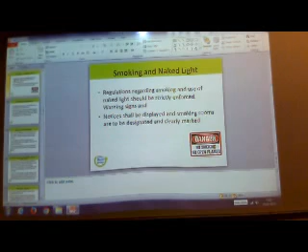If we just carry on from this previous presentation we looked at, we saw that finish up on smoking and naked light regulations.

Firefighting equipment to be available to both ships for transferring, and one of the best mediums to use is foam monitors, where we use a seawater pump, fire pump, and we mix a foam concentrate, and you have foam cannons that you can spread foam to cover and smother any fire that's taking place. Water can be provided in the form of a fog, a mist, which helps suppress any fire or burning.

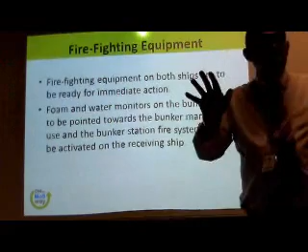And go towards the bunker station. So that's the contingency.

Earthing on a switchboard. The switchboard on a ship. Hello.

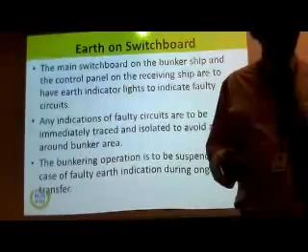When a ship has to generate its own power, its own electrical system - what normally happens ashore, if you get an earth, you know what I mean by an earth? If you get a break - not static, actual flow of electricity. If you have electric cable and the cable gets damaged or burnt and you get exposed conductor, exposed wire, it creates a path to earth. So it's like a short.

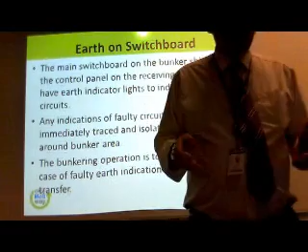But on a ship, if our circuit breaker trips, then we could lose vital equipment, like for navigation, for steering, etc. So we can't afford for a single earth to trip the electrical system.

And what we have on a ship is an earth fault detection system. So if we get an earth fault, we get an indication, an alarm to tell us we have an earth. Earth can be caused by water getting into equipment and leaking, so the electricity is conducting to earth, or it can be caused by a break in the cable exposing live contacts. So we get an earth fault.

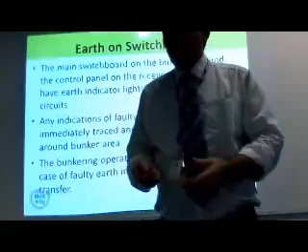If we get an earth fault, what we normally have is an indicator panel that tells us which area the fault is in, and then we can isolate circuit breakers one at a time until the fault disappears. Then we know we've got rid of our earth fault.

And if we get two earth faults, this can lead to a direct short circuit, and this can cause a blackout of the vessel.

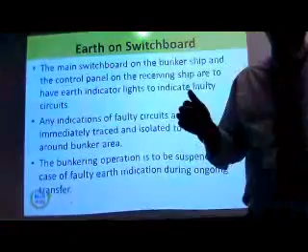On board the ship's switchboard panel, we have an earth indicator light to indicate faulty circuits. We don't want any electrical sparking or arcing to take place that might ignite - so on indication of faulty circuits, we immediately trace and isolate to avoid arcing.

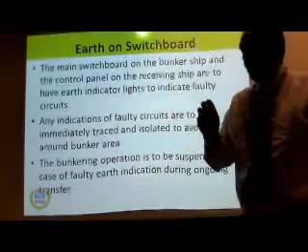As I say, we can pinpoint roughly where it is - breaker by breaker, we can disconnect one at a time till we see that the earth fault clears, then we can investigate that.

So the bunkering operation is to be suspended in case of an earth fault during ongoing transfer, so we can't isolate it. If we can't find out straight away where this earth is, then we need to stop bunkering as a safety precaution. Any questions on that? Yeah, okay.

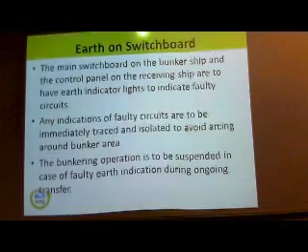You're right in mentioning electrostatic charge - you can get arcing caused by static electricity. So to prevent any arcing between the ship's manifolds, both ships are to be earthed, all hoses to be electrically continuous, and the hose string is fitted with an insulating flange at the bunker manifold.

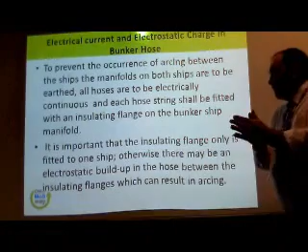So the insulated flange is only fitted on one ship. Otherwise, if we get insulated flanges on both ships, we can get an electrostatic build-up to the hoses and flanges. I'm sure also they provide an earthing line.

Yes, and they are loading or discharging. Yeah, yeah.

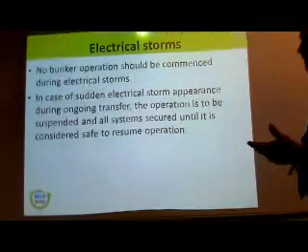Electrical storms - so if we have lightning coming, we don't want to carry on bunker operations then. Sudden electrical storm appearing, operations are suspended until it's considered safe.

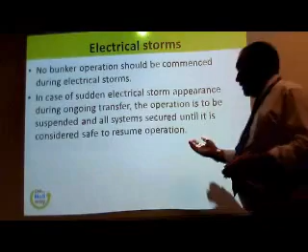Radar equipment, if it's not intrinsically safe - something you wouldn't think of with the ship's radar itself - can cause issues, especially if the bunker barge is a lot smaller, with the radar sweeping across the sea at close range. So the bunker ship normally switches the radar off.

Again, warning signs and instructions should be posted around the area, clearly visible.

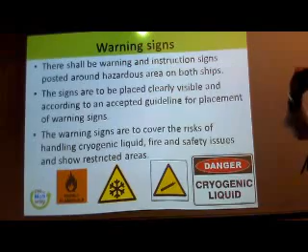Cover the risks of handling cryogenic fluid, which is shown by a snowflake. Fire, obviously, safety, compressed gas bottles, and nitrogen, whatever.

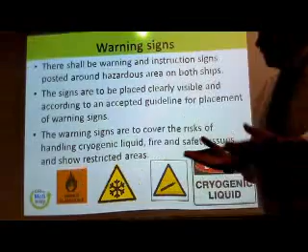So safety is paramount on board ship, and this is just another instance where we apply our health and safety signage and the risks of handling the fluid. So all the crew should be briefed, all the engineers should be aware of what's going on, and so should the deck officers, even though they may not be directly involved.

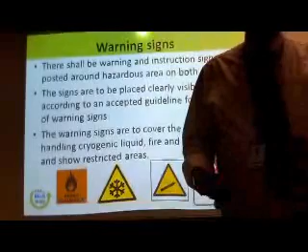From the deck officers' stability point of view, if the chief engineer is going to load bunkers, the chief officer must know about it, because of how it's going to affect the stability of the ship and his loading plan, since you might also be doing cargo at the same time as bunkers. This can affect the trim or the stability of the ship. So the chief officer has to consult with the chief engineer regarding how much fuel is coming aboard, where it's going, and whether it will affect the trim and stability of the vessel.

During the voyage, as you consume the fuel, it can affect the loading condition of the vessel.

Accommodation openings should be closed. It's the same on oil tankers during any cargo operations - they usually make PA announcements that cargo operations are about to proceed, and all openings and doors are to be kept closed during the process.

On gas carrying ships, each individual will have an escape set in their cabin - a small cylinder of air, like a breathing apparatus, with a mask you put over your face. In the accommodation there are gas detectors and gas alarms. When the gas alarms go off, it means gas is entering the accommodation space. As I said earlier, the gas isn't toxic, it's not going to kill you - it's not hydrogen sulfide or anything like that.

It's not like the rotten egg smell you get from some hydrocarbons. It's just that the gas will displace oxygen in the air, so if you have to walk through a gas-filled atmosphere, you'd better have a breathing apparatus set on.

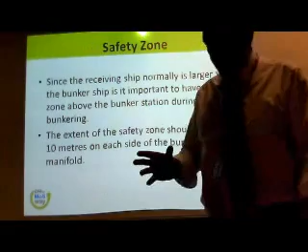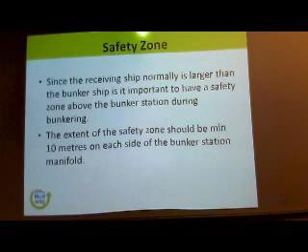The receiving ship is normally larger than the bunker ship. There's a safety zone above the bunker station during bunkering, 10 metres each side of the station. Some ships have a safe area, a citadel if you like, that you can go to and close off - a confined area in the accommodation that is double sealed from outside. We can call that a safety zone, a safe room, or a marked safety zone.

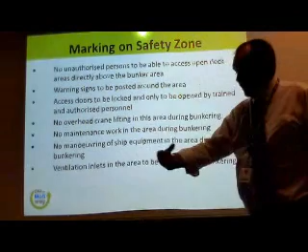No unauthorised person is to access the open deck above the bunker areas, and warning signs are to be posted - no overhead lifting, no maintenance during bunkering, no manoeuvring of ship equipment, and ventilation in the area is to be closed. So if we had engine room ventilation, we don't want the engine room fans sucking in air from that side, so we close the ventilation on the bunker side.

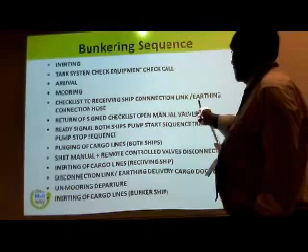So we saw from the video earlier, the animation, that we were going to inert, check equipment, moor, carry out a checklist, receiving ship connection link, earthing hose, return checklist signed, ready signal both ships start the transfer sequence, purge the lines, shut manual and remote controlled valves, inert lines, disconnect, and un-mooring departure, inert and cargo line.

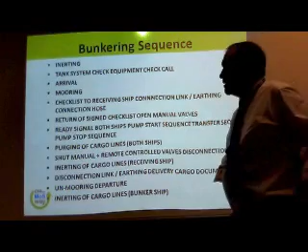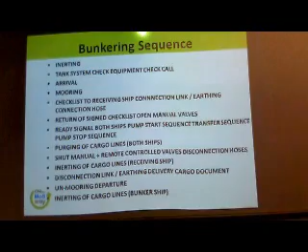So this is a bullet point list from start to finish. The procedure starts with an inerting, it finishes with an inerting. So we're keeping pipes safe, yeah, we go from fresh air to fresh air. We go from fresh air to inert through the sequence of bunker transfer, and then inert, and then back to fresh air again. We never go from a gas state to fresh air without an inert in between. Purging using nitrogen, inerting using nitrogen, yeah.

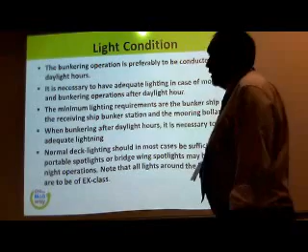Light condition - in a ship's term, light condition is are you loaded, are you light? This isn't meaning light condition, we're talking about the actual daylight available.

So bunkering can be carried out at night time. If you're doing fuel oil bunkering, it's quite common to bunker at night time. But for LNG, they recommend it's preferably conducted during daylight hours.

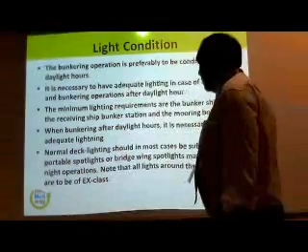Yeah, just to be able to see what's going on, and see any gas escapes or anything like that, and even to see people to signal to, just for a communication point of view, you want to be able to keep an eye on things.

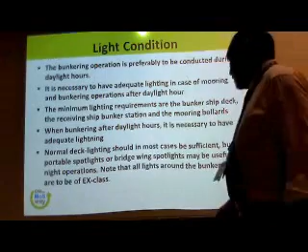It is the word preferable there. We're not saying you can't do it at night time, but if it's to be done after daylight hours, we need to have extra lighting, spotlights. If you don't have sufficient deck lighting, you should put portable spotlights or wing spotlights, so maybe from the bridge you can turn some lamps around and shine down onto the area.

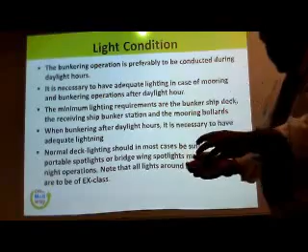And it's just for good housekeeping, making sure everything is okay, it's as it should be, it's tidy, there's nothing to the naked eye that looks incorrect or anything like that. Much easier to do if we have good visibility rather than pitch black.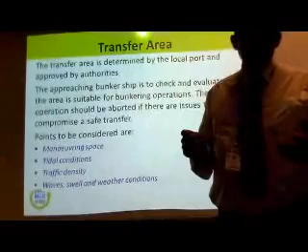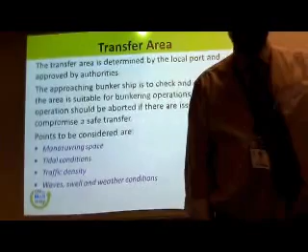If there's any issue to compromise the safe transfer, then we have - supposing there was an emergency within the vicinity, some ship emergency, a ship goes to fire or something, you know, all of a sudden tide is moving, traffic coming, waves, anything that causes a disruption or a possible danger, then a transfer [is stopped]. But we shouldn't get to the stage because we should do in our pre-planning process. We should make sure everything should be [fine].

In case of accident, in oil tankers, I think the damage is pollution and oil spill. In these ships, LNG and LPG, what is the consequence or frequency of one accident? It can do, it can do.

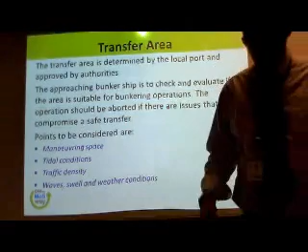If the LNG spills onto the sea, it floats on top of the water. It's much less dense, so it would float on top of the water in a big puddle, and then it would evaporate off. As long as it doesn't ignite, it will go to atmosphere, it will disperse into the atmosphere.

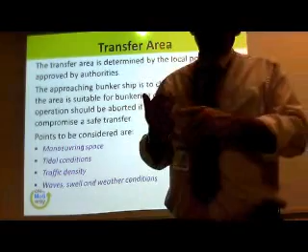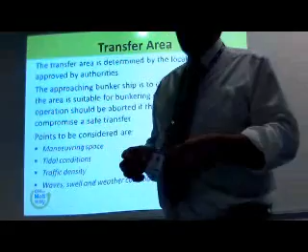Now, recent studies have said that methane gas is second only to CO2 as the major atmospheric pollutant on the planet. So you've got CO2 and we've got methane. A lot of methane is produced organically - cows produce methane gas. When the cows eat the grass and it breaks it down, they make methane.

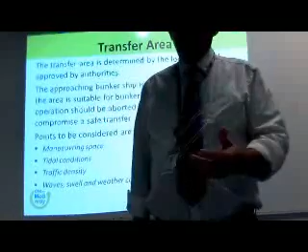In the history of LNG, they had a plant in America, they had a big accident 50, 60 years ago, and they realised the problems of LNG at the time. LNG makes normal carbon steel very brittle. So they didn't realise this, and they had some steel pipe fracture, and it caused a massive explosion. But everyone is aware now of the limitations of ordinary steel with cryogenic substances such as LNG.

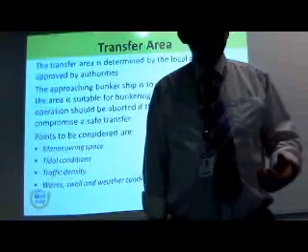So we use special steels that don't get affected by the low temperature. We use containment systems on board the ship when we're talking about burning the fuel. We use double skin pipes, we have inert gas in the space between the pipes. There's a lot of safety precautions around LNG, and there's not been any major vessel accidents. So out of the two things, it's lighter than air, the LNG.

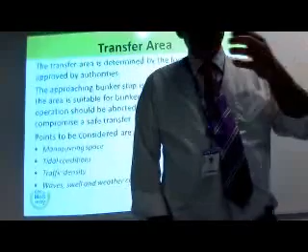When it flashes from liquid to vapour, its volume increases by 600 times. As long as it disperses quickly into the atmosphere, the concentration of the gas is too weak to make it ignite. It also needs a higher temperature.

It's got a higher ignition temperature than propane or butane. So even though you use gas to cook with, it's LNG, natural gas. But if you just opened a natural gas cooking ring, you can't light it with a cigarette. You need a proper flame or an igniter, a proper hot spark to ignite it. It won't ignite immediately, which makes it a little bit safer.

The LNG has got no smell. But for domestic gas that we use for cooking, they add an odorant so you can smell it and recognise it. If you walk into your house and can smell gas, you call the gas board to come and fix it, because if you can't smell gas, you might go and light a match.

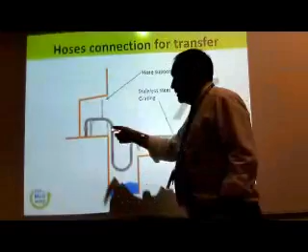The hose connection for transfer, with slack to take up the relative motion between the two vessels. The hose needs to be supported because we don't want any tugging on the flange that might cause damage to the coupling.

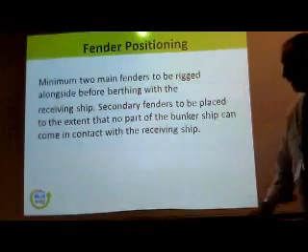Fenders are fitted between the vessels to prevent them touching each other, so the ships don't touch metal to metal and cause damage. No part of the bunker ship can come in contact with the receiving ship, so they've got big plastic inflatable fenders that go along the side of the ships.

Pipelines connect the bunkers to the LNG tank. Usually two pipes, one for the liquid, one for the vapour, the gas return. They can also have a third pipeline for nitrogen.

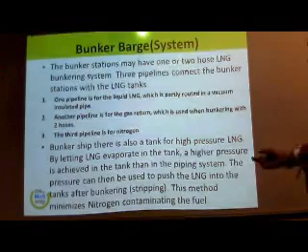The bunker ship is also a high pressure tank for LNG. If we let the LNG evaporate in the tank, higher pressure is achieved in the piping system. This pressure can push the LNG into the tanks after bunkering, which is called stripping down. This minimises the nitrogen contaminating the fuel.

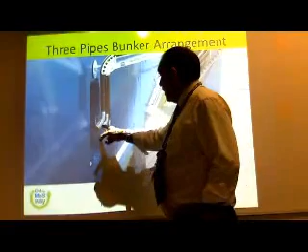Three pipe arrangement shown here: one would be your cargo liquid, your gas, and your nitrogen.

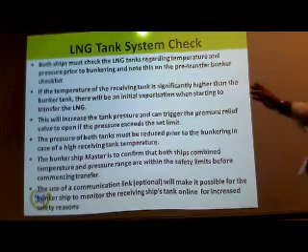As I mentioned before, we'll do checklists. We'll check the temperature and pressures. The temperature of the receiving tank is higher than the bunker tank, and as soon as the gas comes in, some of it will vaporise, and that can increase the tank pressure and trigger the relief valves.

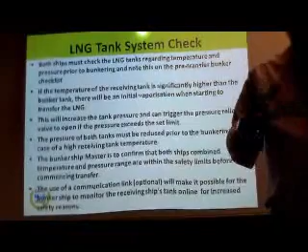These tanks are all pressure vessels. As such, they must be fitted with a relief valve. A relief valve is a spring-loaded valve, a heavy spring that holds it closed. If the pressure rises in the tank, the relief valve lifts and relieves the pressure.

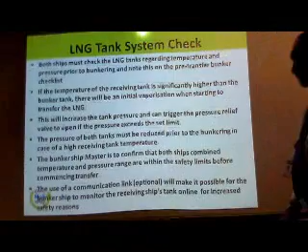The pressure of both tanks must be reduced prior to bunkering in the case of receiving a high tank temperature. The master confirms that the pressure and temperature ranges are within safety limits. The communication link makes it possible to monitor the transfer.

As already mentioned, pumping can use pressure instead of pumps. If we have pressure, we can use that pressure to push the flow of LNG into the tank, or we can use a pump.

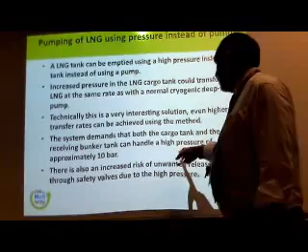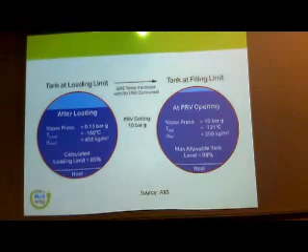The tank and receiving bunker tank can handle pressures of approximately 10 bar, so the pressure vessel is sufficient. You would never get 10 bar in the cargo tank, it would come apart. But in a pressure vessel, you can deal with that. So these are our pressure vessels.

We've taken from one and filled the other one. We will fill only to a certain amount; there will always be an ullage space. What I mean by ullage space is an empty space between the liquid and the cargo tank itself. That'll be a maximum of maybe 85 to 90 percent.

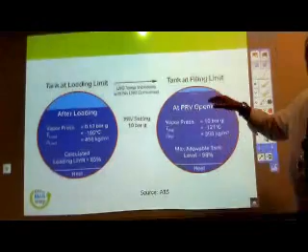There's a formula that dictates the maximum allowable volume to which the tank can be filled.

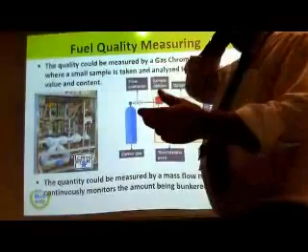We'll also measure the quality. Same as I said to you about bunkers, taking bunker fuel, we would take a test sample, analyse it. We can take a sample from the fuel here and, using a gas chromatograph, analyse it for its energy value and content.

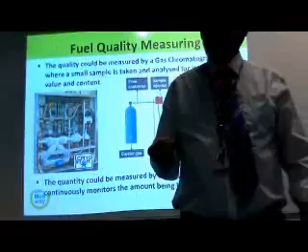What do I mean by energy value? The calorific value, how much energy. Because we want to know that the gas we're getting is good and it's got sufficient calorific value that we're paying for. We analyse the gas, take a sample.

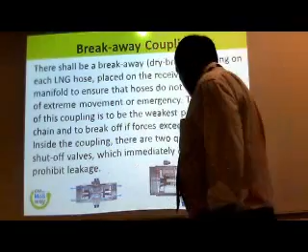During the flow or connection of the hoses, we have these valves or couplings, a breakaway coupling on each hose. So the hoses don't break in case of extreme movement in an emergency, this coupling will disconnect and shut at both sides. You can see the spring-loaded valves and the seal here.

When they're connected together, against that spring, these two pins locate. This connects up here to here, the two blue parts. So these valves lift off their seats against the springs, and that allows flow either way.

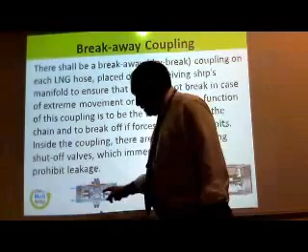In an emergency, if these are pulled apart, instantly they close under the action of the spring. So this is the hose, this is the connection, then the gas is trapped. As soon as we pull that apart, the gas is trapped in each pipe because of the quick closing connection.

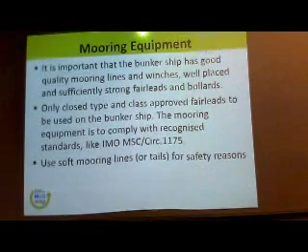We need good quality mooring lines so that the ships are pulled tight towards each other and not moving about too much.

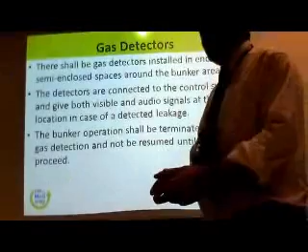And gas detectors fitted so that they give audible and visible signals in case a gas leakage is detected. As I was saying about having light during daytime operations, if it's night time maybe you won't see a leakage, but if you have alarms there, you can detect it.

People transferring is not normal, but if they have to, they should be on an insulated lightweight gangway with rails and a safety net.

Drip trays, I mentioned earlier, insulated stainless steel trays are fitted below the manifold to prevent damage to the steel hull in the case of leakage or brittle fractures.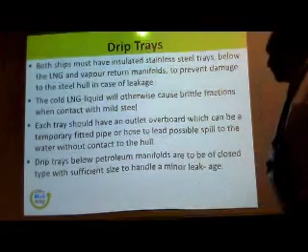So drip trays below the manifolds, petroleum manifolds closed. Do you know what I mean by drip trays? It's a tray that's going to catch any spillage there.

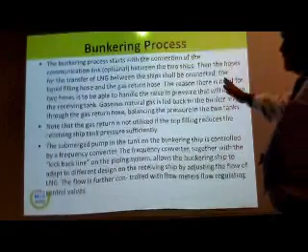So again, the bunkering process: communication, hoses for the transfer will get connected, and any natural gas is led back to the bunker ship through the gas hose, balancing the pressure in the tanks.

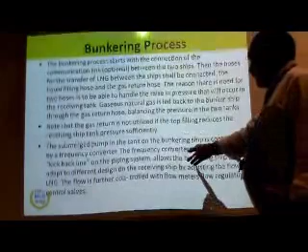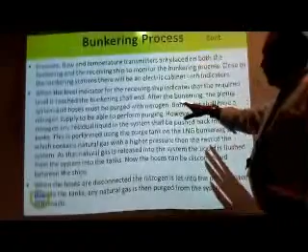So we're going to put the pump on in the bunker ship. It's going to pump the gas to the cargo ship, the receiving ship, and that will start the process. I'm not going to go through all of this, but you can get copies of these presentations. We're going to measure the flow, the pressure, and the temperature throughout the process, and then once the bunker transfer is finished, the hoses are disconnected, nitrogen purges, and any natural gases are vented through the vent masts.

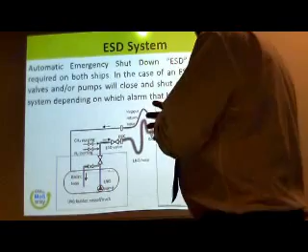We need to build in some emergency systems, and we have emergency shutdowns required on both ships. In the case of an ESD, emergency shutdown, different valves are operated and closed to shut down.

So we've got this LNG pump from the bunker vessel. We'd be passing gas up through the hose into the storage tank of the receiving vessel. You've got an emergency shutdown here, at the manifold.

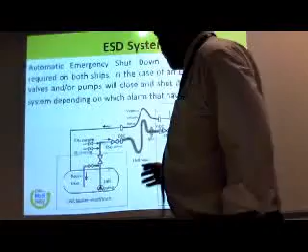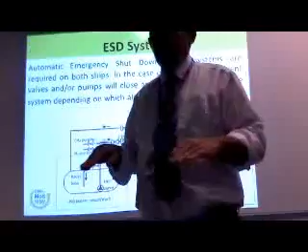After it's on this side of the manifold for this vessel, and on that side of the manifold for that vessel. So if we had an emergency here, for example, a hole in the hose or something like that, and it parts, there's some leakage, a big leakage coming through the hose here, then these emergency shutdowns will shut this and shut this, and they would instantly close the electrically operated valves and give off an alarm as well.

We can still be connected using the vapor side, but if the leakage is taking place here, then that is partly shut down. So ESD is the abbreviation for emergency shutdown.

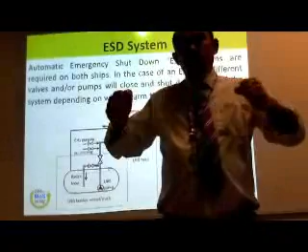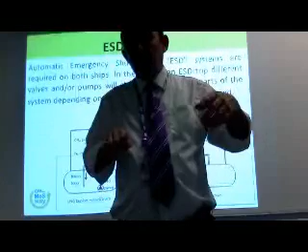Also, what can happen, a phenomenon that wasn't really known about, is that if a ship is alongside doing bunkers and another ship comes along too fast, it can cause interaction and pull the ship to move that way. So now ships have speed limits, they can't pass more than 4 knots, for example, so they don't create this disturbance.

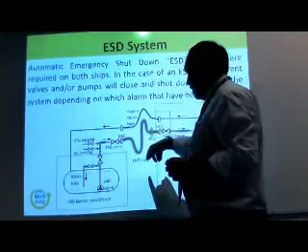If the vessels were pulled apart like this, you've got the quick closing connections that we saw earlier that come apart and close off. But if there's any actual rupture in between, then you get a leakage of the gas and liquid. We want these emergency shutdowns to operate.

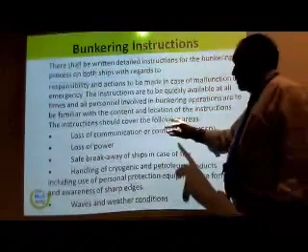There should always be a list of instructions and who's responsible, everyone familiar with what to do for safe bunkering, and also instructions to cover what should happen in any situation such as loss of communication, loss of power, or breakaway of the ship from its position, etc.

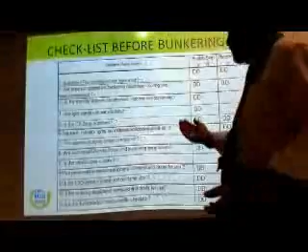We have bunker checklists. Like most things, we have checklists for a lot of the stages we do. Bunkering's no different, you check off everything in order.

Bunker barge. Any questions? All clear?